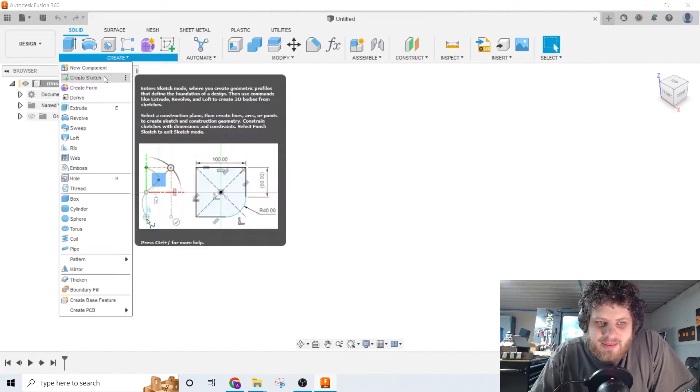And then it's going to pop up here these three little shapes, these three little squares. These are the different origin planes. They're basically just a place where you can stick your first sketch. So I'm going to stick my sketch right there. I'm going to hover over it, and I'm going to click.

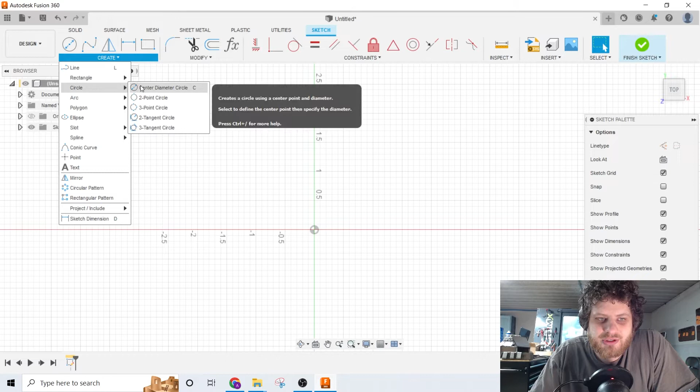Now I'm going to click on this circle tool right here. It says Center Diameter Circle. And again, if you don't see that button, it might be here under Circle. So I'm going to click that. And then it wants me to place two different points -- the center point and then an edge point. And then I hit escape to get out of that tool.

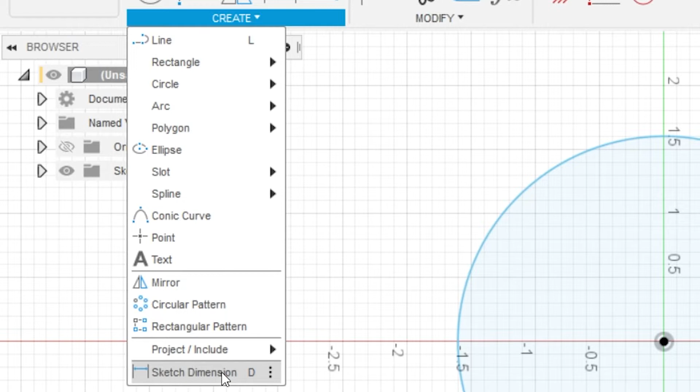It doesn't matter where you put those first points, because now we are going to put a dimension in. The button for dimension is down at the bottom of the Create menu right there. Though if you notice right here, it says D next to it. That means by pressing D on the keyboard, it'll do exactly the same thing as pressing the button. From now on, I'm probably going to hit D out of habit, but if you need to know where the button is, it's right here. So I'm going to click on it.

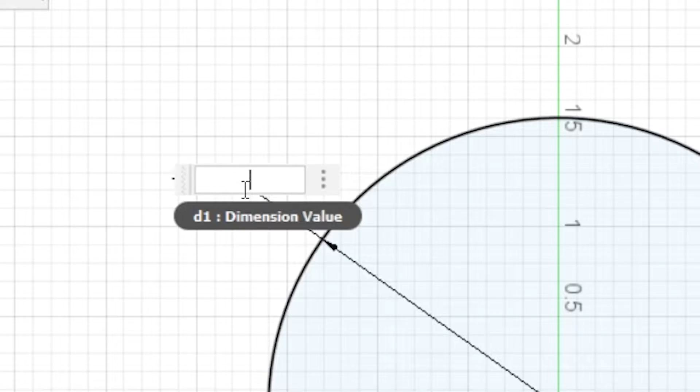Then I'm just going to click on the edge of my circle, and you'll see that it gives me this dimension here. I'm going to click one more time, and it's going to highlight this blue, expecting me to type something in. So I know that my can is 2.11 inches in diameter.

Now that is the can, not the outside of our little cap. And I know that I want some extra space between the edge of my can and my cap. So I'm just going to type in plus 0.25. That'll mean my circle is a quarter inch bigger than the can, which sounds good to me.

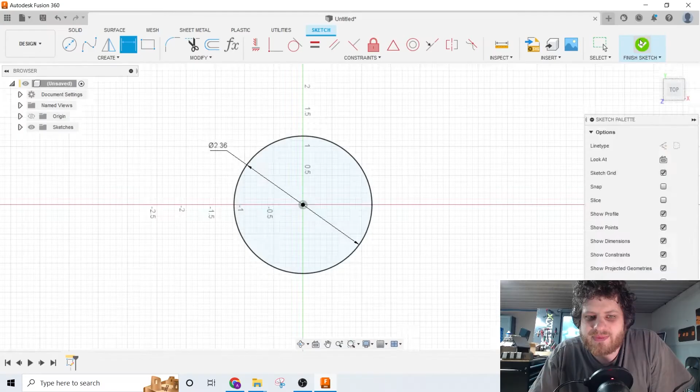To finish off this sketch, I'm going to hit the Finish Sketch button here in the top right corner. And that'll bring me back into 3D mode here.

So now we want to make this circle into basically a puck shape, a cylinder. We want to make our circle into a cylinder. And we do that with the Extrude button, which I have a video on if you want to watch that, link in the description. So I'm going to press the Extrude button.

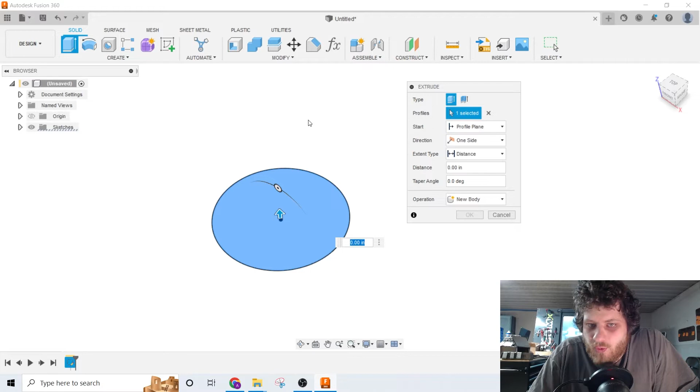It'll pop up a new menu for me here. If I had more than one sketch, I might have to choose the profile that I wanted to extrude. Profile in this case just means a closed shape.

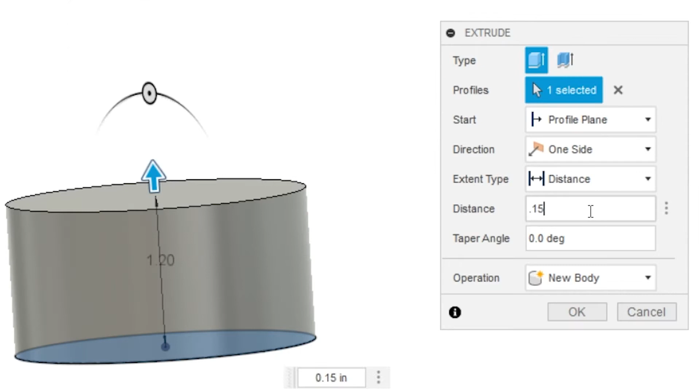It already guessed what I wanted to do, so I'm just going to use that arrow and drag it up. Now I have the cylinder here, and it says it's 1.2 inches. Based on my measurements earlier, I know I want to make that 0.15 inches plus 0.125 inches. When I hit OK, I'll have the start of my cap.

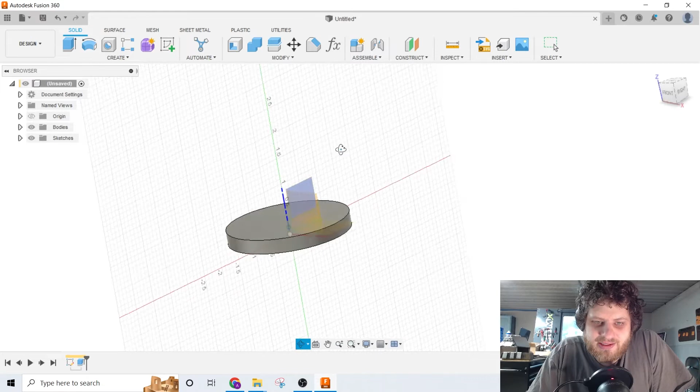But we don't just want a puck that we can put on top of the can, we want it to actually fit on the can. So now I'm going to place a second sketch on the side of the can. I clicked on the Create Sketch button, and now I'm clicking on my cap here, creating a new sketch right on top of the cap. You can see it's not on the old plane anymore, it's moved to be on this surface here.

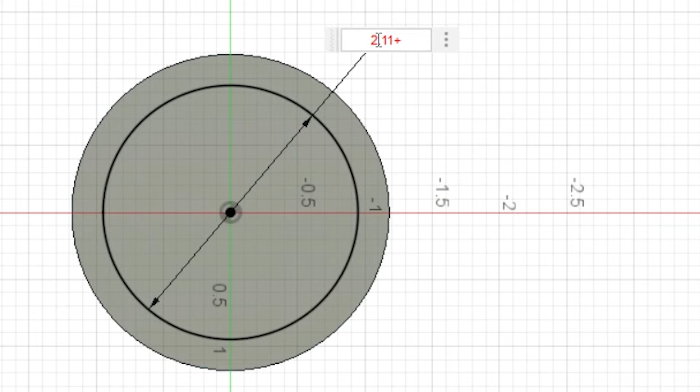I want a new circle that is on top of this circle, just slightly larger than our can. Our can was 2.11, and we want this to be just a little bit larger so that it fits on easily. Let's say 0.03 inches larger. When I hit OK, you can see that's how big it is.

I'm going to finish the sketch, and now I'm going to use extrude, but instead of adding material, I'm going to remove material by cutting down into the can. From my measurements earlier, I know I want this to be negative 0.15 inches. It is negative because it is cutting down into this surface. If it was not negative, it would be putting material up there. So we want it to cut 0.15 inches, that's why that's negative.

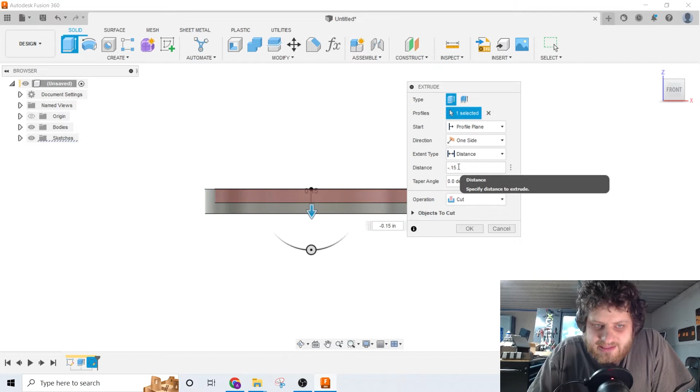And there's the basic shape. That should fit nicely on top of our can. But let's make it look just a little bit nicer. First of all, if you're 3D printing this, it's always good to have a chamfer along the edge of your part that you're putting face down on the bed of your printer. A chamfer is just cutting the corner off with a straight diagonal line.

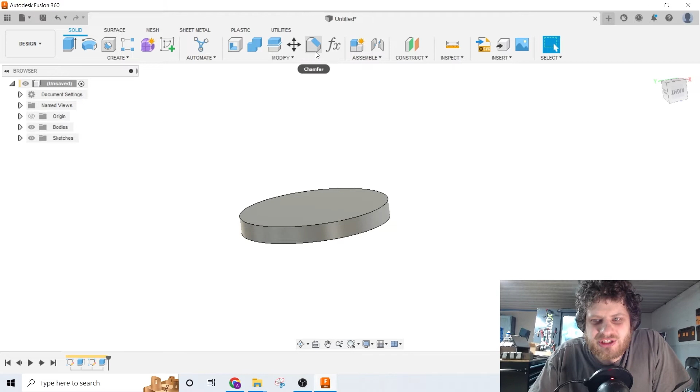So I'm going to use this chamfer button here, then click on the ring, the top little circle here, and I can type in a number like 0.05 inches. That'll cut off the corners, which will make it a little bit nicer in the hands, and it'll help it print better. I'm just going to hit OK.

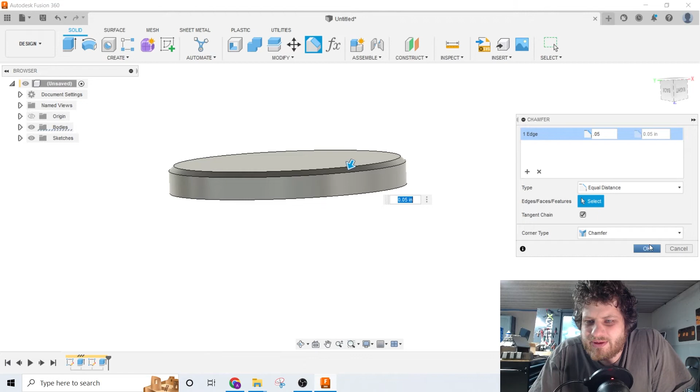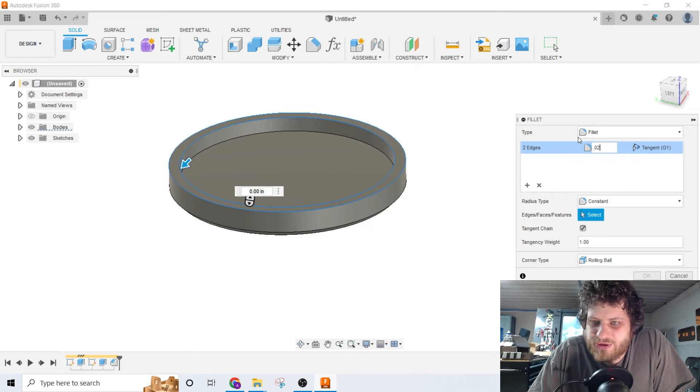Let's do something similar on the top, except instead of it being a straight line, I want a curved line, and that is called a fillet. Not a fillet, a fillet. So I'm going to select that line, and then that line, and then make up a number. How about 0.02? Oh, that seems a little small. How about 0.04? There we go.

So now there's a nice rounded edge, which will be good on your hands. Anything that you touch, you generally want to fillet on, it feels nicer on the hands than a sharp corner. It'll also help it slip over the can easily. Again, I'm going to hit OK.

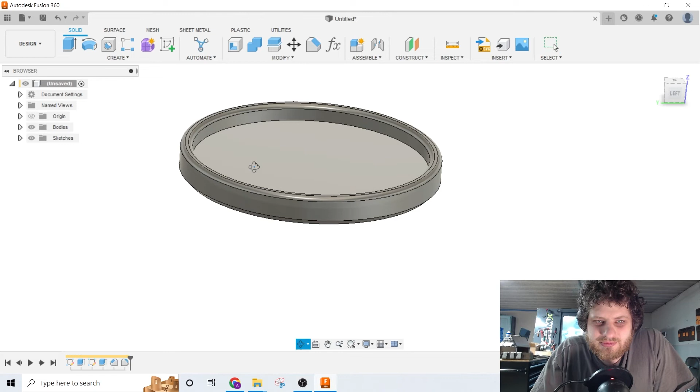And I think that's our final design there. I know Fusion is really intimidating when you first get into it. There are so many buttons, and how do you figure out which one to press? Well, first of all, 90% of the time you are just using the extrude. There's a bunch of other fancy things, but they're basically all just different variants of extrude.

There's the revolve button, which is basically just extruding around a corner. There's the sweep button, which is just extruding along a line. If you understand extrude, you can do anything in Fusion. Secondly, all of these buttons basically work in the same way: you start with a sketch, and then you do something to make it three-dimensional. Extrude is the simplest method.

So if you're trying to draw something like this aluminum tape measure, all you really have to do is break it down into its core features. You have to think about what this looks like if you were to break it down into a couple spots. Well, okay, there's one big cylinder that defines most of it, and then I'm adding a little bit of a rectangle down here for where the tape measure goes in and out. And this one has a little bit of a circular cutout so that you can use your finger to stop it.

And that's really all it is. Other than that, it's just throwing a bunch of fillets in there. It's a rectangle, it's a cylinder, and it's one cutout. If you think about your projects like that, just a series of basic shapes, Fusion really isn't that hard to learn.